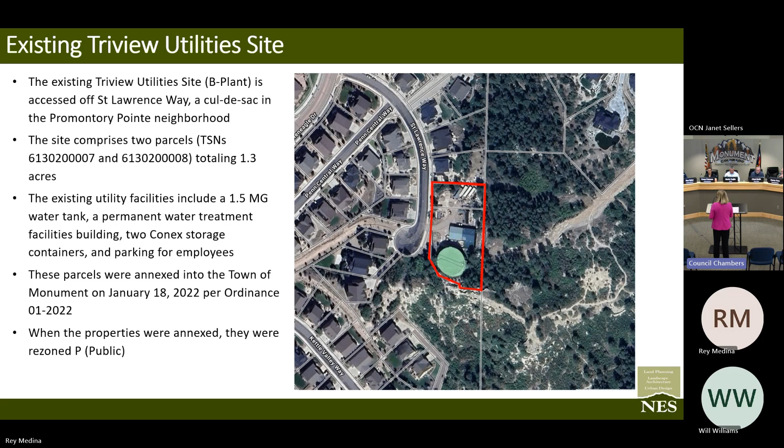So these are the 4 applications we're proposing. There's the rezone, so we're expanding the site. I'll show this in a graphic in a second, which will explain it better.

We're expanding the site by 1.1 acres to the east. We're rezoning that, which is currently zoned PUD, to P zone, so that the entirety of this parcel, moving forward for the tank site, will be zoned P. We're also doing a final plat to not only plat these 2 currently unplatted parcels, but extend that lot to incorporate the new area that is being brought into the site, and also replat the tract that it's been taken out of in the adjacent Sanctuary Pointe development.

In addition to that, we had to do a major amendment to the Sanctuary Point PUD plan, because the tract was identified as open space and utilities, and because we were reducing that slightly, we had to amend that plan and amend the open space calculations. I'm going to go through these one by one in a second, so it will hopefully make a lot more sense.

So that's where we started with this. We're doing this, we want to do the site plan for the expanded tank site. Oh, but that triggers a rezone, it triggers a plat, and it triggers the PUD amendment.

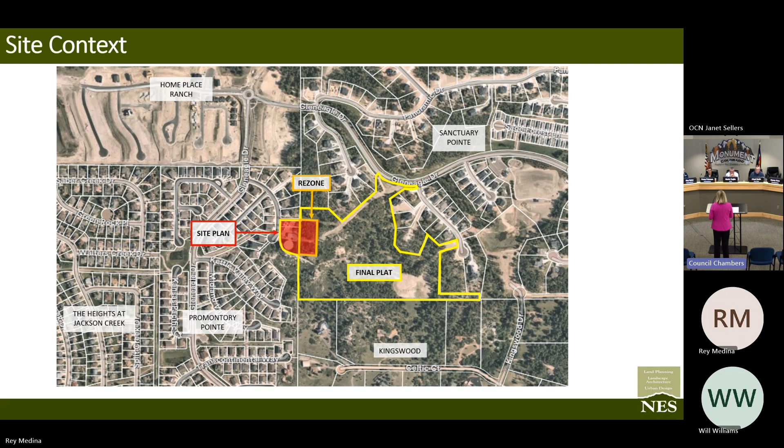That's the area we're just rezoning, the area that's within Sanctuary Point currently. And then the yellow line shows the tract that we're taking that area out of, which is going to be part of our final plat. And then that is also the area that's impacted by the PUD amendment.

So just showing this in a little different context, this is an extract from the zoning map. You can see here how the existing Triview utility site is zoned P for public use, and that explains what those uses are for. Obviously, a utility is one of those public uses.

To accommodate the expanded tank site, we are having to expand to the east into an area currently zoned PUD. You can see the blue is all PUD surrounding it, but they're all individually separate. There's the Promontory PUD, there's the Sanctuary Point PUD, and to the north there's the Home Place Ranch PUD. So we're changing the Sanctuary Point PUD.

The request is to rezone 1.1 acres, which is that red area, of Tract C of Sanctuary Point filing 8, to P. So that's what the rezone is proposing. And then ultimately that entire area will change color to that kind of yellowish color and become a P zone.

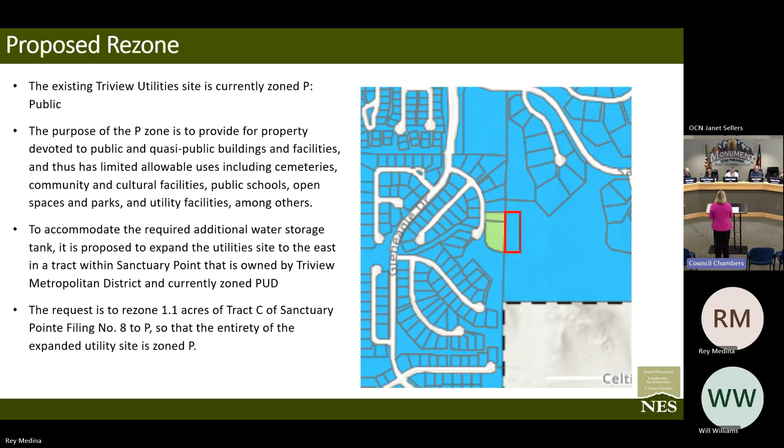So the subdivision plat is equally complex. The area that we're rezoning and bringing into the site plan is currently part of Tract C of Sanctuary Point filing 8. So we are having to replat that to take the portion, the 1.1 acres, to put it together with the existing utility site to create lot 1 of a new filing, called the Triview Utilities Subdivision. As a result of that, we have to rename and replat the former Tract C, which will become Tract A of the Triview Utilities Subdivision.

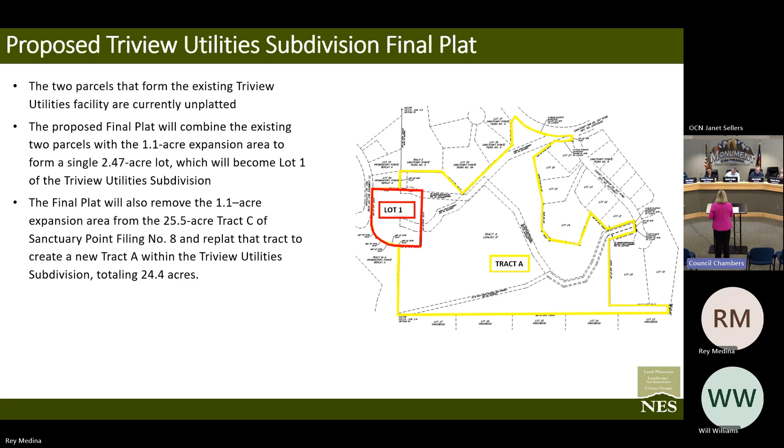So that is going to be the new plat moving forward; we will create a new lot for the tank site, and then Tract A, what was Tract C of Sanctuary Point, will become Tract A of this subdivision, and that will reduce by 1.1 acres.

So the amendment to the Sanctuary Point PUD: the phase 3 PUD for Sanctuary Point was approved in January 2020. Included with that was a total of over 51 acres dedicated to Triview Metropolitan District for common open space, trails, utilities, drainage, and landscaping. This tract, to make it even more complicated, was called Tract A of phase 3 on the PUD, and was identified for a range of uses, including utilities and open space.

And this was the reason we postponed from the last hearing to this hearing, because we hadn't included this amendment when we first submitted. So this was a discovery by Dan. So you need to amend this plan, primarily to address the open space reduction, which triggers the major amendment.

At the time we were proposing this PUD for Sanctuary Point, there was a 20% requirement for open space within PUDs. We provided a total of 44% open space, so significantly over the 20%. By taking this 1.1 acres out of Tract A, we're reducing the total open space to 43.65%. It's a minor, negligible reduction, and still significantly over the 20% that was required at that time. I keep saying at that time because that's not a requirement in the current code.

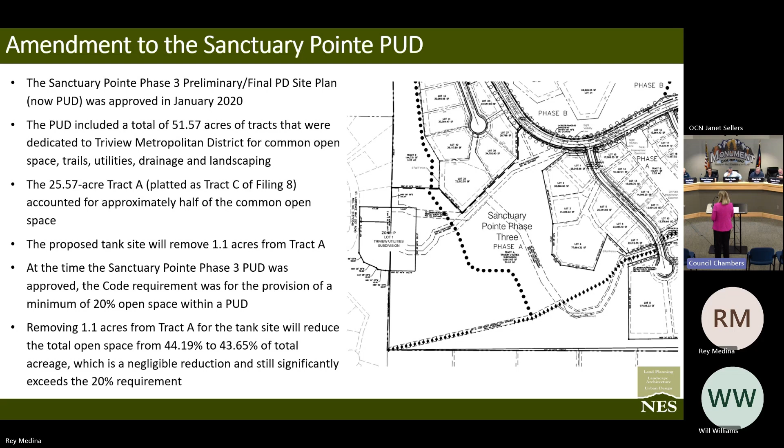So I hope that explains the major amendment. I told you it's complicated, so I'm going through this really slowly because it is complex. Next slide.

So now to the meat of what we're here to present, which is the site plan for the tank site. Those are the applications I just referenced, the rezoning, the final plat, the major amendment, all required to facilitate this site plan. So here is the site plan.

You can see this is the site plan as submitted. I've got a better graphic later, but this is oriented differently, so you can see the north arrow is actually to the left of the page. To the south there is St. Lawrence Way. You can see in black the current access point. The existing tank site is there, and the proposed tank site is just to the east of that, in the southeast corner of the new lot.

The proposal is to continue to take access off St. Lawrence Way and utilize the area in grey as a proposed new driveway to connect from the existing parking area through the site to provide access to the tank site. That will be on a berm to create that access, and the combined area of the existing and proposed structures on the site is a little over 18,000 square feet, which is 17% lot coverage, whereas the P zoning allows 35%.

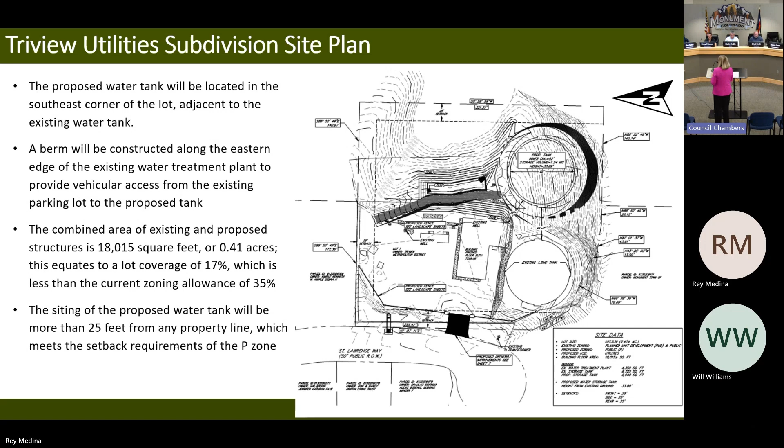With regard to the siting of the water tank, that will be more than 25 feet from the property line, and the setback for P zone is 25 feet all the way around. So all the existing and new structures meet the setbacks. Next slide.

Same graphic, I just want to talk about some different aspects. The operations of the water treatment plant are currently 7 a.m. to 3 p.m., 7 days a week. The new tank, as noticed, will be accessed via the existing driveway of St. Lawrence Way and that new gravel connection.

So there's no proposed access from the east through Sanctuary Point, for example. It will continue to utilize that existing access. There is a fence around the property currently that will be expanded to incorporate the new tank site once it's constructed. All the operations on the site will continue the same, so the traffic will be the same. It won't generate any more traffic. Maintenance of the tank site, both tanks will occur at the same time.

One important thing to note: Triview's intention to build a new office, a headquarters, and with that, a lot of the operations will move to that new building. So at that point, the project site will only be accessed once a day to perform checks of the treatment plant. So ultimately, even though this isn't going to generate more traffic, the existing traffic will reduce, and it's pretty minimal as it is today.

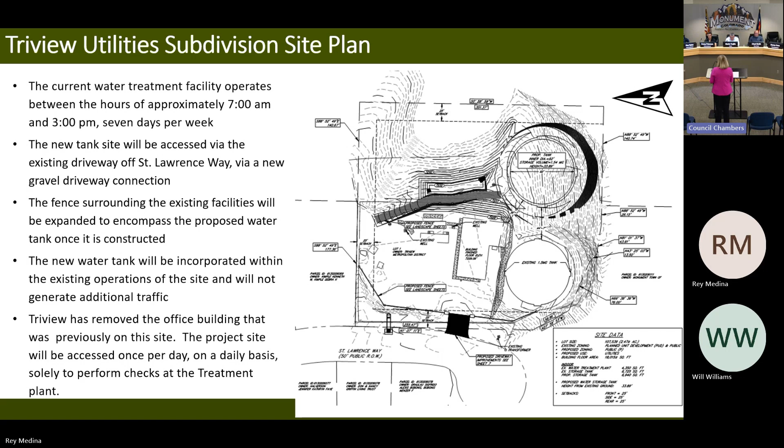Next slide. Jim mentioned the new fence that's going to be provided. There's currently a fence - I've got some photographs later - that runs along St. Lawrence Way, right on the right of way. It's not the best fence, it's a little tired.

The proposal is to move it back about 25 feet up onto the slope. It's not a massive slope, about 5 feet higher, but to put it at the point where it will have most benefit from a screening point of view, and also to make it a screen wall, a 6-foot precast concrete screen wall, which would be much more attractive than the current cedar fence. So that will be an improvement.

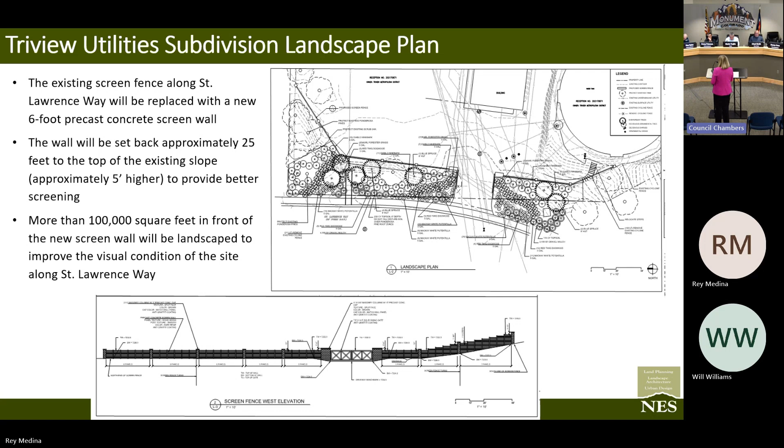Then in front of that fence, where it will have the most benefit, will be a substantial landscaped area, about 100,000 square feet of landscaping, which given a relatively small frontage onto St. Lawrence Way, is quite a significant amount. That will not only help screen the site, but also improve the visual quality of that section of the right-of-way. Next slide.

So regarding the height of the new tank, it is going to be the same height as the existing tank, so just short of 34 feet. The height limit in the zone is 35 feet, so we meet that.

One thing that will become more apparent, we did do a visual simulation, a view shed analysis, is that the tank is going to be set into an existing slope. It slopes quite significantly uphill on the south side, and it's going to be set into that slope to really reduce the visual impact of the water tank. While it will be visible from St. Lawrence Way, from the east, from the Sanctuary Point side, it's really going to be screened by a combination of topography and tree cover to the south.

And even to the west, the existing tank will screen the proposed tank. So it's really not going to be that visible from many viewpoints, and where it is, it's going to sit comfortably in with the environment. But we do have some visuals for that. So next slide.

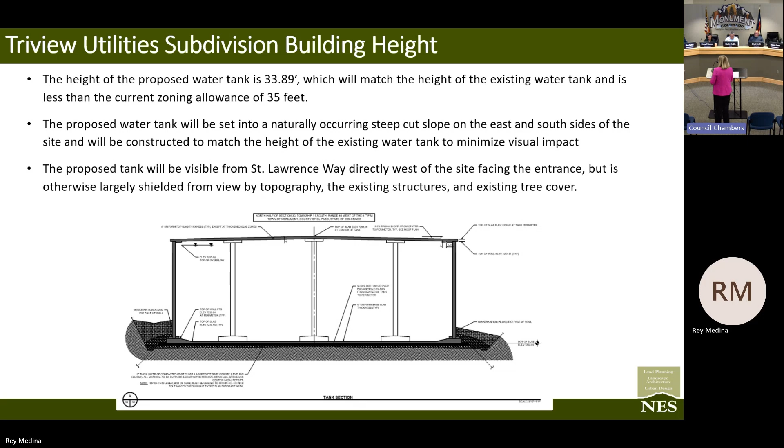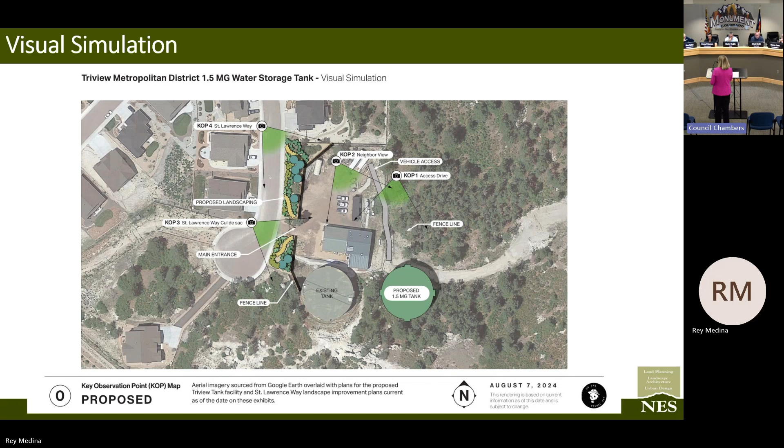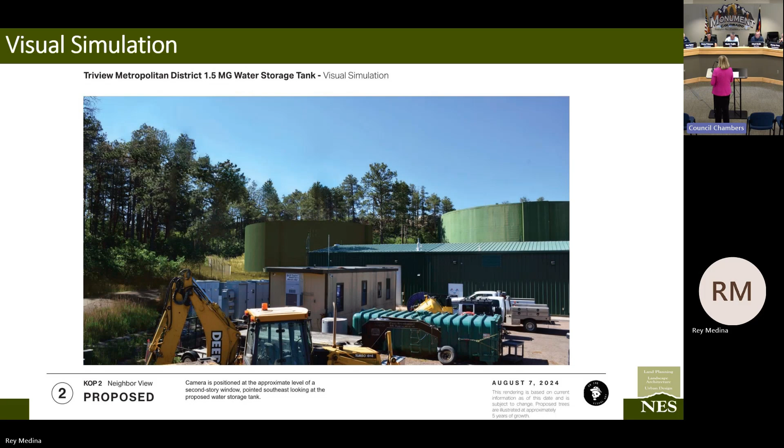Next slide. So here we're looking at the tank site from the northeast corner, from the adjacent residential home immediately to the north of the property, looking across the water treatment plant and the existing tank. Next slide. And this shows how the new tank will be viewed from that location.

Next slide. So this is from directly west on the south end of the site, looking at the existing fence along St. Lawrence Way, the access point, and the existing tank and water treatment plant.

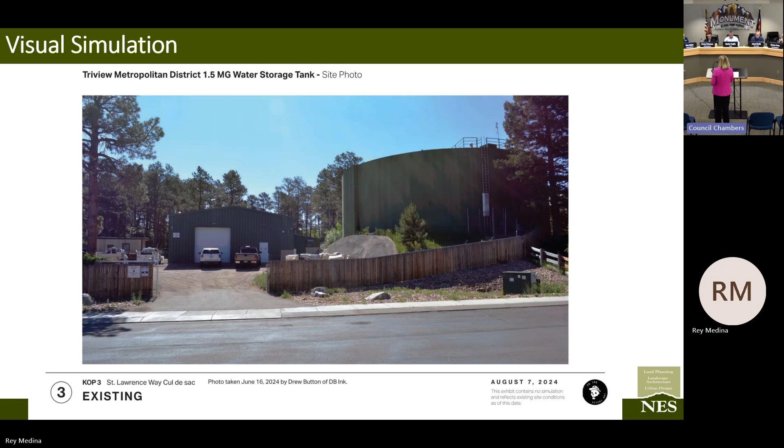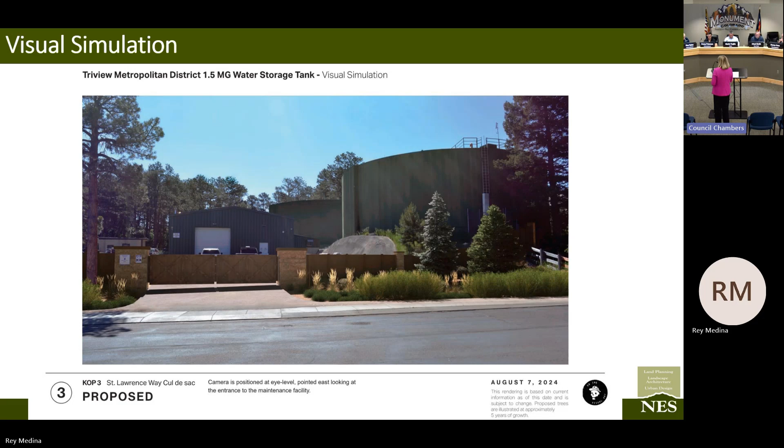And this shows how that entry is going to be enhanced with the new slot wall, a new gate for the entrance. You can see the existing tank and then the new tank just in the background there. It will really be barely visible from St. Lawrence Way.

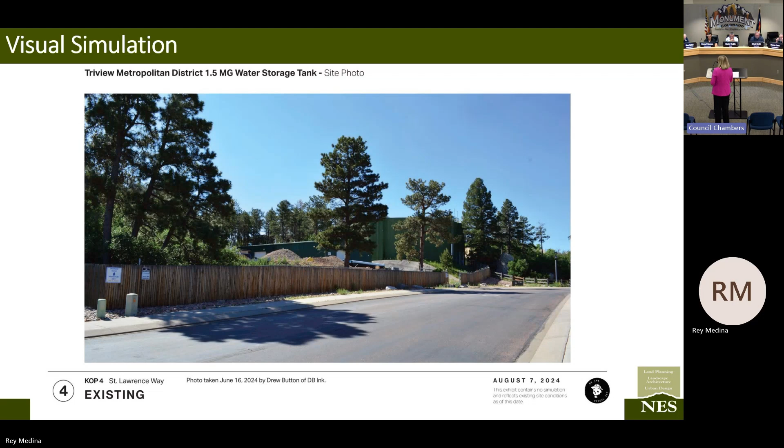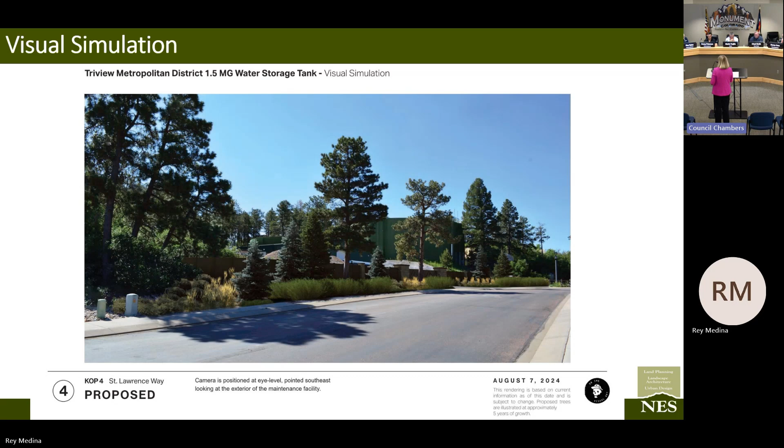Next slide. And this is an angle showing much more clearly now that existing cedar fence on the edge of the property. Next slide. And this shows how the new slot wall will be set back slightly higher, and then the front will be landscaped and the existing tank - you could just about see the new tank there in the background. Next slide.

I just wanted to go generally through the review criteria because there are 4 separate applications, so there are a lot of different review criteria, and a lot of them are quite technical. So I'm going to hit on what I consider the main ones: comprehensive plan, compatibility, and traffic, which are the main ones that usually are concerns in a neighborhood.

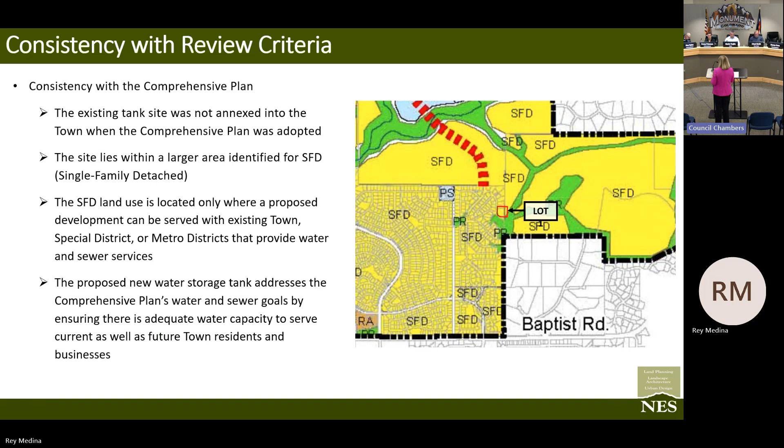With the comprehensive plan, I just want to emphasize that the existing tank site wasn't in the town at the time the comprehensive plan was adopted in 2017, so it really wasn't even contemplated. The site lies within an area which is primarily single family detached residential. Obviously, utilities are a fundamental requirement to support single family detached residential. There isn't any specific land use in the comprehensive plan that talks to utilities, but in general terms, the goals of the comprehensive plan for water and sewer seek to ensure there's adequate capacity to serve the needs of current and future residents of the town, which is exactly what this project is seeking to do. So I'd say the very specific land use provisions of the future land use plan don't really apply to this site, but there are goals that support the project. Next slide.

And then compatibility with the surrounding area. I've just gone in detail over the viewshed analysis and location. I think the key things are we've chosen a location that has natural slope, natural screening with trees and topography. We're proposing a new screen wall, which provides not only better screening from St. Lawrence Way, but a much more attractive visual appearance to the property, and there will be substantial new landscaping associated with that. Based on the viewshed analysis we prepared, we believe there's really minimal impact from the new tank on the surrounding area.

One interesting thing in the zoning criteria is a criteria that asks: is the rezone needed to provide land for a demonstrated community need or service? We believe that providing additional water storage and fire flow capacity for Triview District to accommodate the build out of the district is an important community need and service.

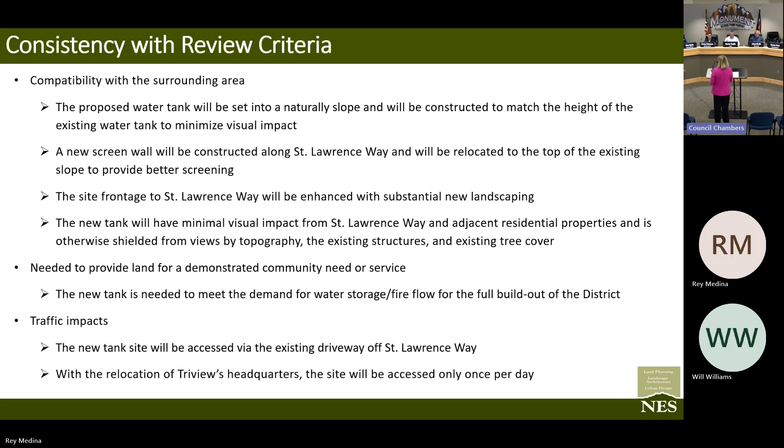Regarding traffic impacts, as I mentioned, the existing traffic to the site is minimal. The new tank site will be accessed via the existing access point on St. Lawrence Way. It's not going to generate any new traffic, and the relocation of Triview's headquarters will actually reduce that existing traffic significantly. And with that, happy to answer any questions.

Perfect. Thank you, Andrea. At this point, what I'd like to do is go ahead and open up public comments, obviously those personnel in the room first. If there are any open public comment, please.

Mr. Chair, can we complete our portion of the report? I know this is a panel, we'd just like to close out our portion. Sure, that'd be great. Thank you, sir.

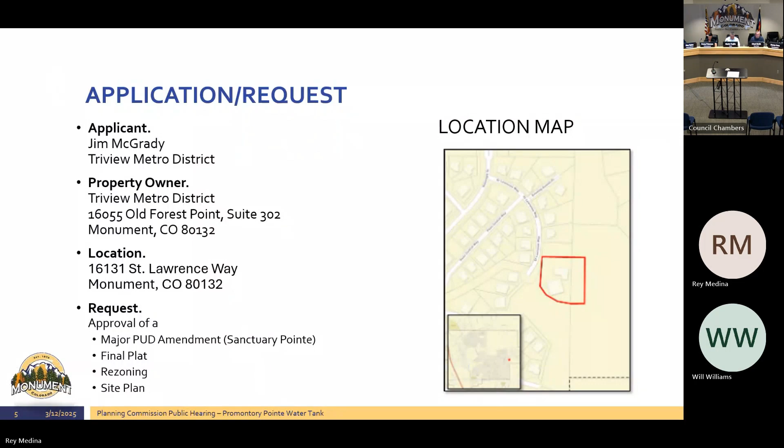All right, thank you, sorry about that. So we'll conclude with our proposed finding of fact from staff. Number one, the proposed use meets the intent of the comprehensive plan's designation for the property.

On-site circulation and access are appropriate for the private water tank site used for public benefit. Water tank design in terms of orientation, spacing, materials, exterior color, and texture, storage and lighting is compatible with the existing development. Landscaping is quality design that enhances the site and is compatible with the surrounding neighborhood as shown by amount, types, and materials used. There will be adequate off-street parking, both standard and ADA accessibility, and the contents and form of the proposed final plat conform with all technical plat requirements.

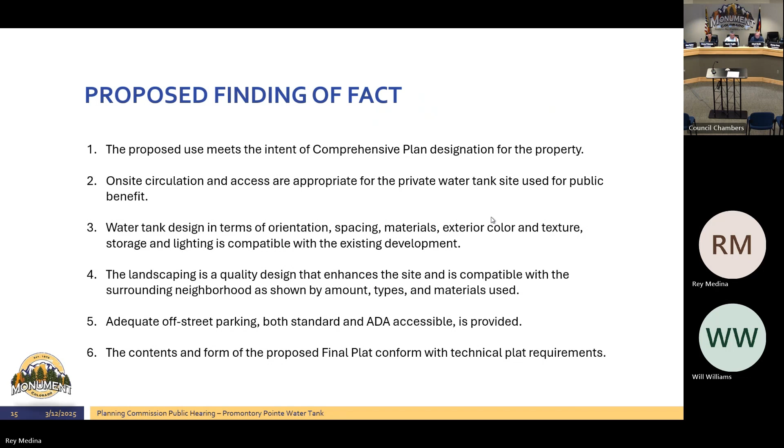Our recommended action is a motion to make a recommendation to approve the major PUD amendment to the Sanctuary Pointe filing PUD, rezoning Lot 1 of the Triview Utility Subdivision to public zoning, the final plat to be known as the Triview Utility Subdivision, and a site plan for Lot 1 of the Triview Utility Subdivision, as supported by the attached findings of fact and described by the following documents: the final plat, the drainage report, the site plan, and the major PUD amendment. And that is our conclusion. Thank you.

Thank you, Rey. At this time, we're going to go ahead and open up public comment. If there's anyone in the room that would like to make a comment, please do so. Come on up, and then put your name on the roster. Anyone have any open comments? No comments? Rey, online, come on up, please.

I just had a question. I did get a letter, my husband and I got a letter that said I guess we would be affected. We live in the cul-de-sac below. Looking at the plan, it looks wonderful, but my question is, why did I get a letter? Would it impact us in any way from our view from Kettle Valley Way? You said the water tank would be the same height as the existing water tank, and it's going to the east. I know there's rock formations there that we look out at. Would that water tank be built higher so we would see it, or is it going to be the same height as the existing water tank?

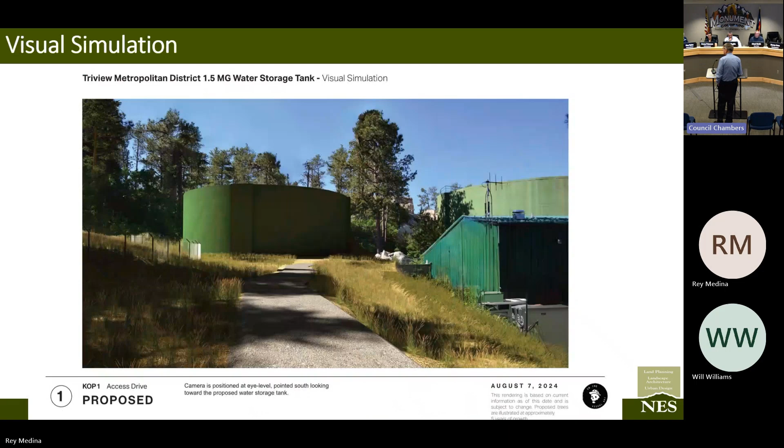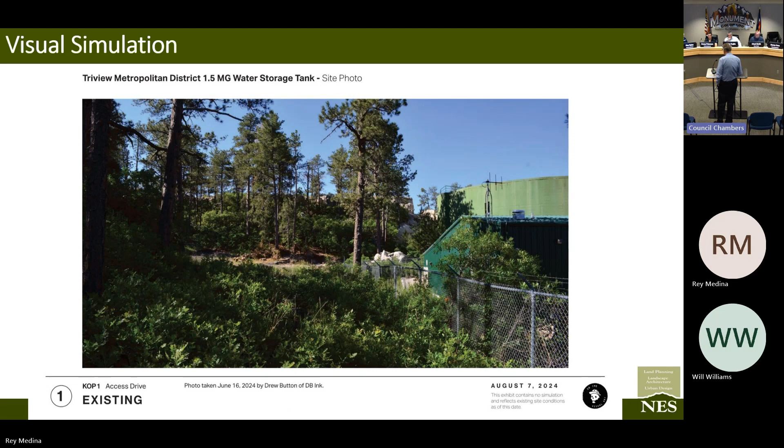On the right side of the graphic, there's that dirt road. I don't know if you want to classify it as a road or a path. It's actually a pipeline easement. I wasn't certain, is that where construction access will be to the project? No, that's a great question, because that was a confusion to some folks. That's where our pipeline comes in from the Northern Delivery System into this water complex, and that road is actually the pipeline easement.

We have just completed a reseeding of that whole area, so the last thing we want to do is access that site and destroy all the seeding we just accomplished. So all construction traffic will travel up through St. Lawrence Way.

Lawrence, yes. The last question I had was, what type of mitigation is in place or will be in place in the event of some catastrophic failure in one of the tanks? It has an overflow, so a tank like that is not going to fail, but operations can cause various things to happen. For instance, a valve sticks open, you lose communication with one of your pump stations and it keeps pumping and fills the tank up. Each one of these tanks has an overflow, and that overflow will discharge away from the homes into storm sewers, etc. So there won't be anything that could possibly damage any of the homes nearby.

Quick question. Does this tank require—because the district over time has acquired additional land—was this originally not foreseen? It was actually always been planned. We've always planned a second tank here. In fact, if you look at that picture, see the three trucks right there? The building to the right has been removed, it's been demolished. But where those three trucks were was where the other tank was going to be.

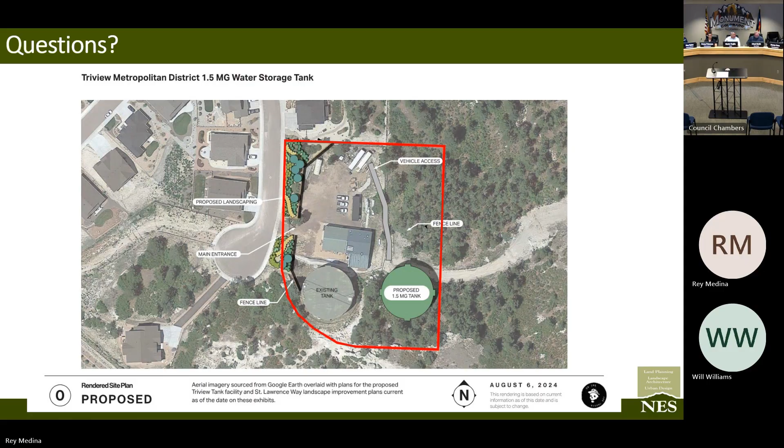Thank you, Rey. Next, we're going to move forward. These are non-agenda public items. If we have any of those, defer to staff. Rey, any of those?

Motion to make. Yes, yes. You did. Just want to make sure that we dotted all our T's and crossed our I's. So, yes, read per verbatim. Correct. Thank you.

Non-agenda public items. Rey, any for staff? So there's nothing. I just wanted to allow or kind of bring the floor first.

Our mayor LaKind is here tonight. He wanted to speak, and I also wanted to provide an opportunity for Commissioner Egley and Smith to report on our activities last week. We had a busy week last week, and I've talked about it enough, so I'd rather toss it over to you, and I can add anything if you miss something. Thank you, sir. Mayor, sir.

Well, thank you. It's only the second time I've stood before the planning commission, so first I wanted to thank all of you for serving. I know there's some new faces I've seen on paper when we go through the approval process to add more commissioners to the planning commission. Also, thank you for both the collective effort and the individual efforts of those of you participating on the comprehensive plan, and those on the steering committee. It's a lot of work ahead of us, as residents and as those of us appointed and elected, to get through the next 18 months. We have a very competent consulting firm, as well as the staff. Everybody's invested. So I really just wanted to come here and thank you for all the effort you're going to be putting in over the next 18 months.